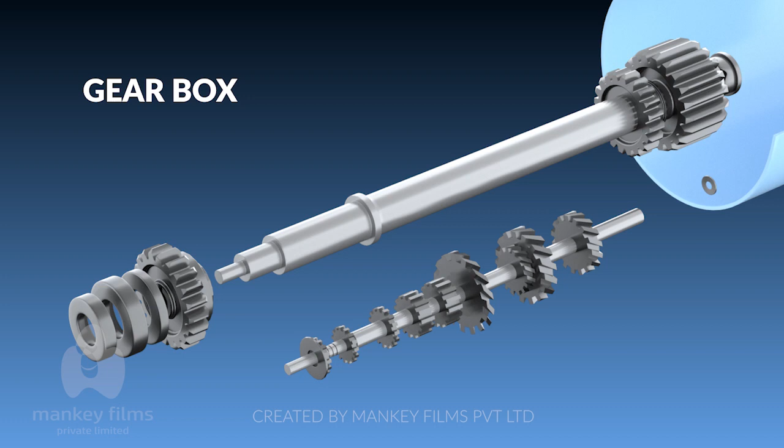In general, there will be a lot of resistance for a vehicle to move on the road. This resistance is because of the road, the air and load of the vehicle. A gearbox helps us to attain different torque and speed to overcome these resistances. When a set of gears is arranged in a shaft, it is called a gear train. There are three different types of gear trains: simple gear train, compound gear train, and power train.

Simple gear train. When there is only one gear on each shaft, then it is known as a simple gear train. A simple gear train is designed for one of the purposes: to increase torque, to increase speed, and to change direction. Like I said here, the small gear rotates and drives the bigger gear to rotate. For example, let's say gear 1 has 10 teeth and gear 2 has 20 teeth. Assume gear 1 rotates at 50 rpm.

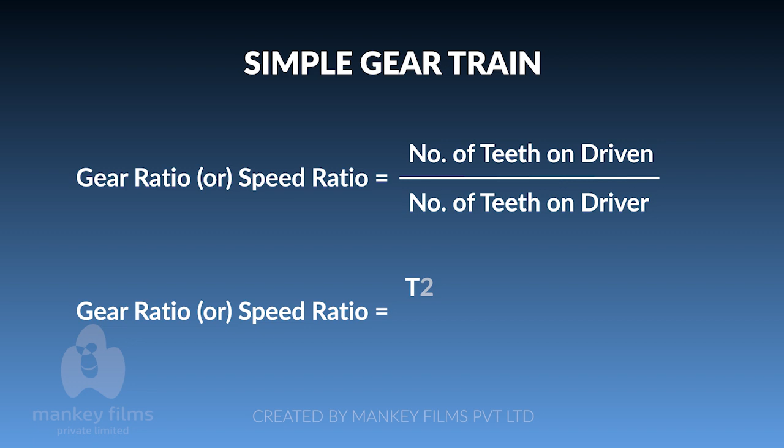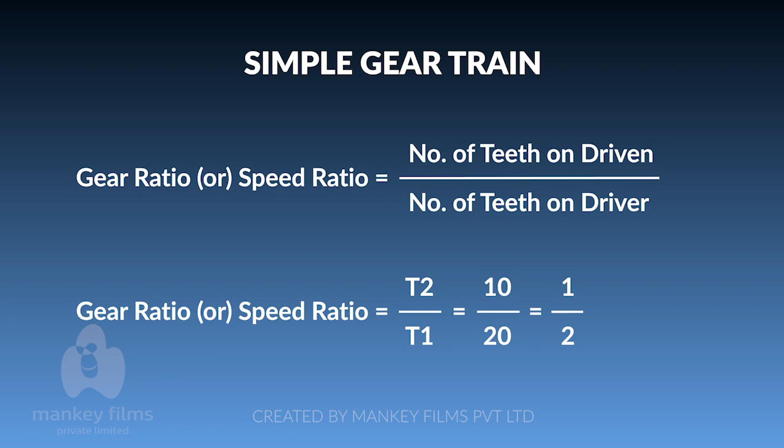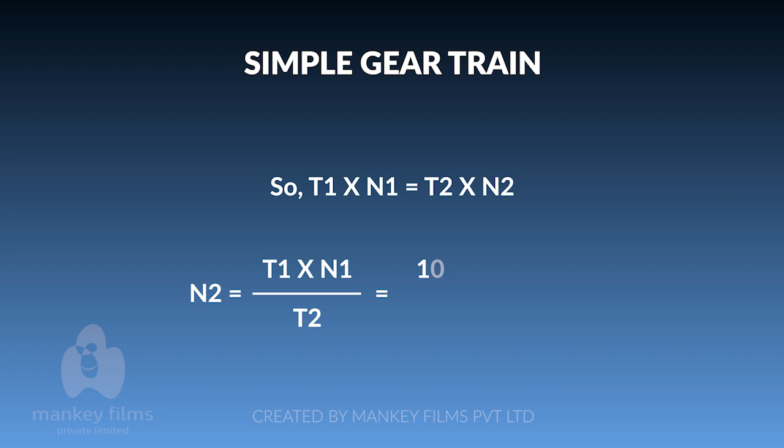So, to find the gear ratio or speed ratio is equal to number of teeth on the driven divided by number of teeth on the driver. Gear ratio is equal to T2 divided by T1. In this case, T2 is 10 and T1 is 20. So, 10 divided by 20, which is equal to 1 by 2 or 1:2. So, T1 into N1 is equal to T2 into N2. So effectively, N2 is equal to T1 into N1 divided by T2, which in this case is equal to 10 into 50 divided by 20, which is equal to 25. So N2 is equal to 25.

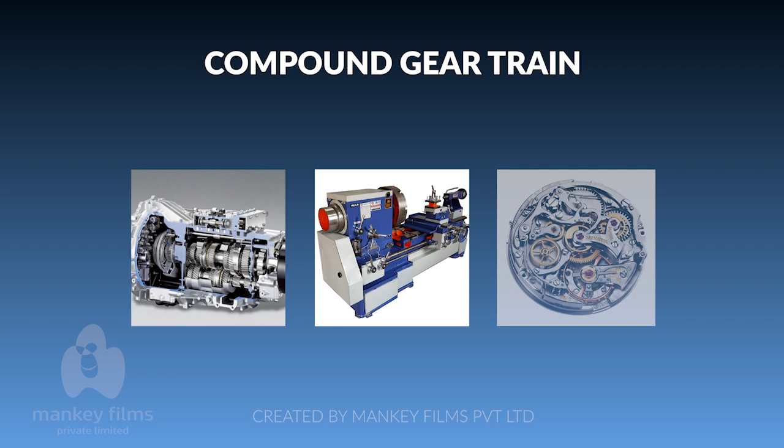The next one is compound gear train. When there are more than one gear on a shaft, it is called a compound gear train. In this type, there is an intermediate gear which helps the driver gear to rotate the driven gear. These types of gear trains are mostly used in automobile gear systems, lathe machines, clocks and watches. Generally, compound gear trains are used where the generated power must be regulated before the usage. The formula to find the gear ratio here is gear ratio is equal to product of the number of teeth on the driven divided by product of the number of teeth on the driver.

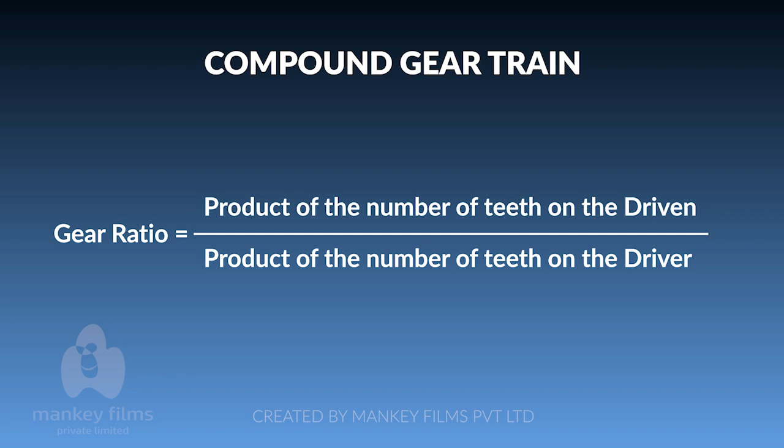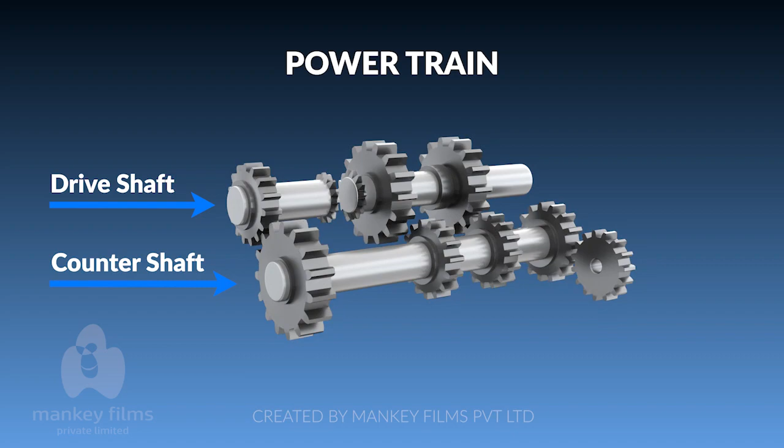Sliding mesh gearbox. Sliding mesh gearbox is nothing but a transmission system that consists of various sets of gears and shafts that are arranged together in an organized fashion. Here, the gear shifting is done by the sliding of gears towards the right and left over the shaft with the help of a gear lever operated by the driver. It has three shafts: clutch shaft, lay shaft, and main shaft. The clutch shaft transmits the power from engine. The lay shaft acts as an intermediate shaft which helps in rotating the gears of main shaft. The main shaft acts as an output shaft which transfers the power from engine.

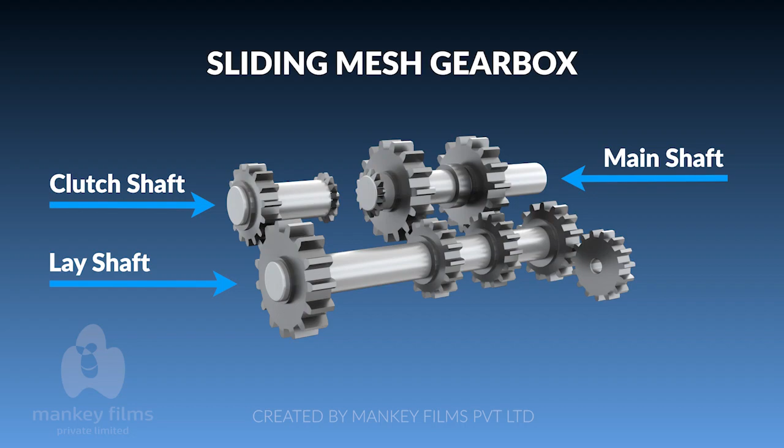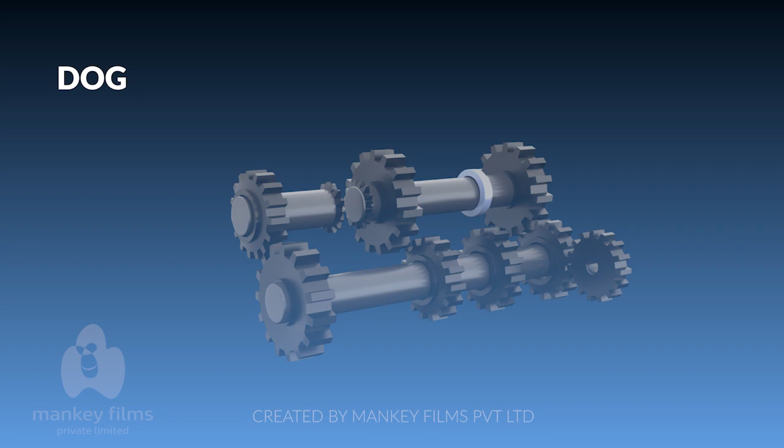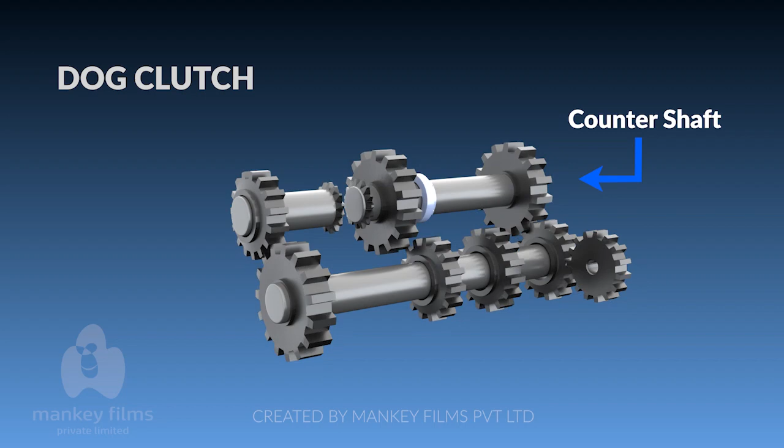The next one is constant mesh gearbox. As the name states, in this gearbox, all the gears in the main shaft are constantly meshed with the corresponding gears in the counter shaft. But there will be no power transmission. To transmit power here, we use the dog clutch. The dog clutch collides with the gears of main shaft and transmits the power received from the main shaft. In this type of gearbox, the helical gears are engaged, and since more than one tooth is in contact at a time, the gear shifting is so smooth. And also, since we use a sliding dog clutch, the wear of gear is less.

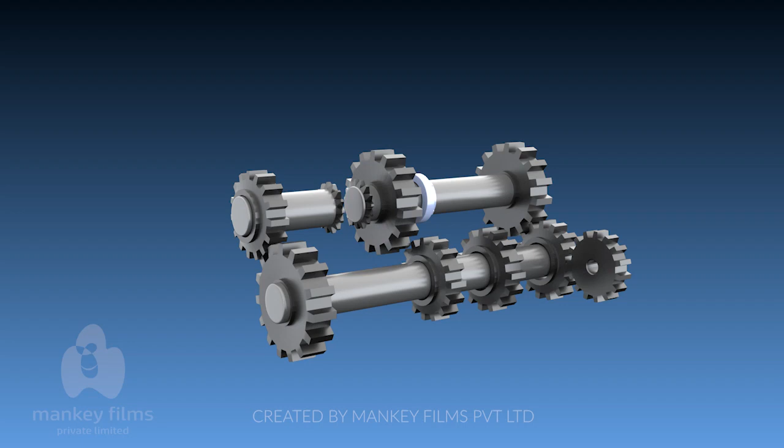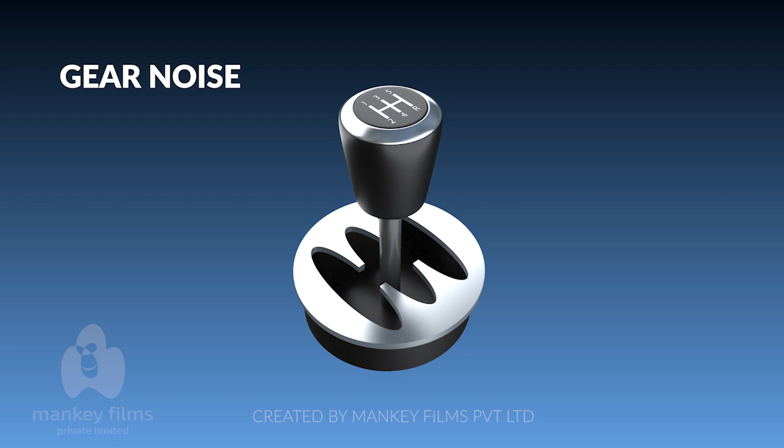Now let's look at troubles caused by these gearboxes. Gear noise. The gearbox causes noise when the gear shifting fork is arranged improperly. The misalignment between the gearbox and engine also causes the gear noise. The gearbox needs to be lubricated periodically. If not, it generates noise. Also, broken gear teeth cause these kinds of noises.

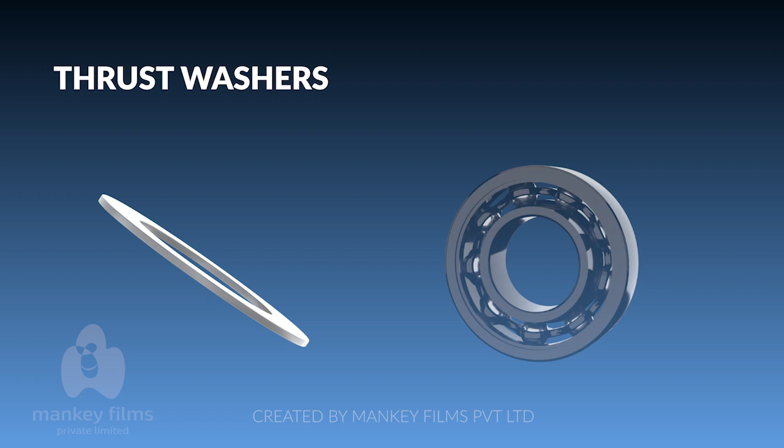Thrust washers. It's fitted with roller bearings. Thrust bearings or thrust washers are used to limit the end play and also reduce the friction between two rotating parts. Roller bearings are used in combination with flat thrust washers to control end play of a shaft or the gap between a gear and its drum.

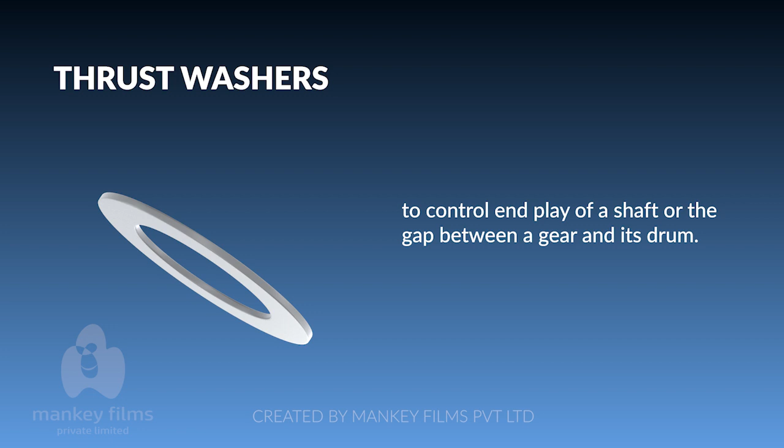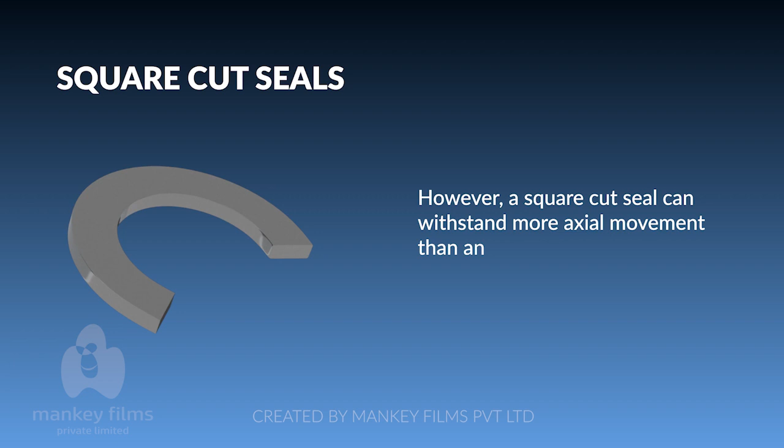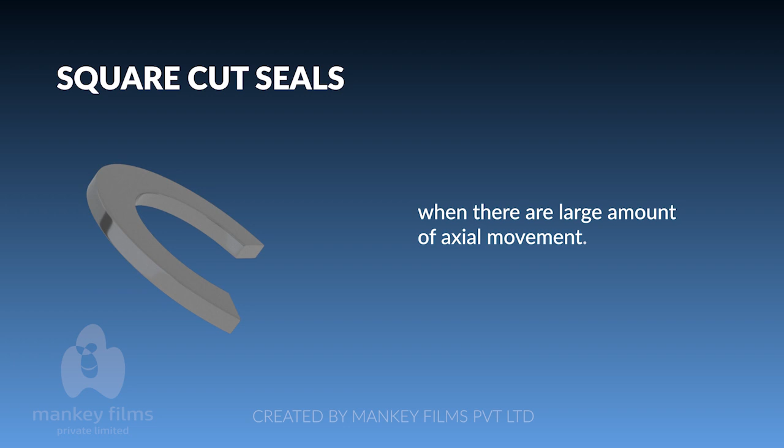Square cut seals. It is similar to an O-ring. However, a square cut seal can withstand more axial movement than an O-ring can. Square cut seals have a rectangular or square cross section. They are designed this way to prevent the seal from rolling in its groove when there are large amounts of axial movement.

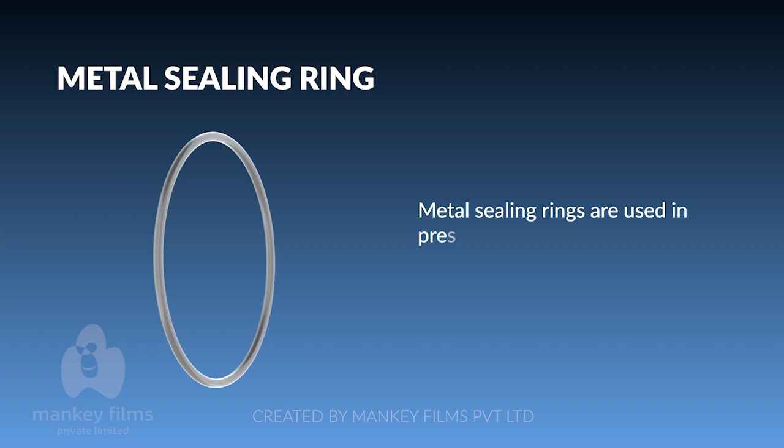Metal sealing rings. The metal sealing rings are used in places in which some leakage is acceptable. Metal sealing rings are used in pressurized transmissions. Ring seals are made of cast iron, nylon or Teflon.

Teflon seals. Some transmissions use Teflon seals instead of metal seals. Teflon provides a softer sealing surface, which results in less wear on the surface that it rides on and therefore a longer lasting seal. Teflon seals are similar in appearance to metal seals except for the hook end type. The ends of locking Teflon seals are cut at an angle.

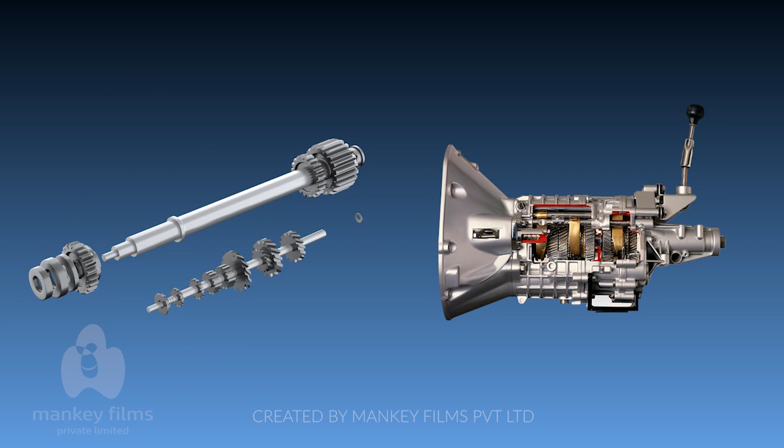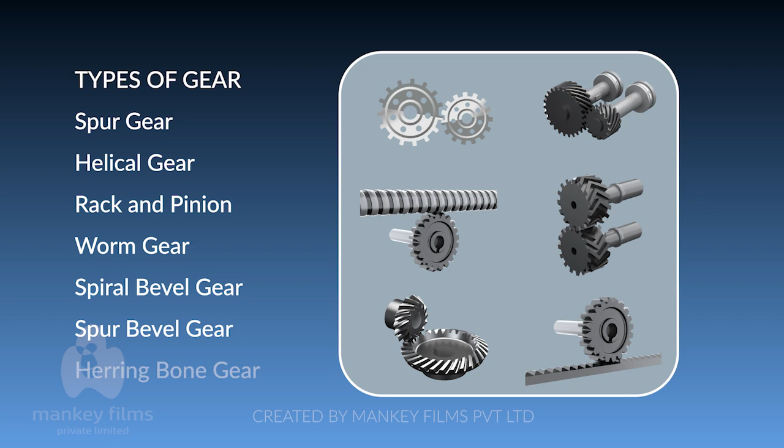Now that we have seen the gear train and gearbox, let's learn about gears. There are 7 different types of gears: spur gear, helical gear, rack and pinion, worm gear, spiral bevel gear, spur bevel gear, herringbone gear.

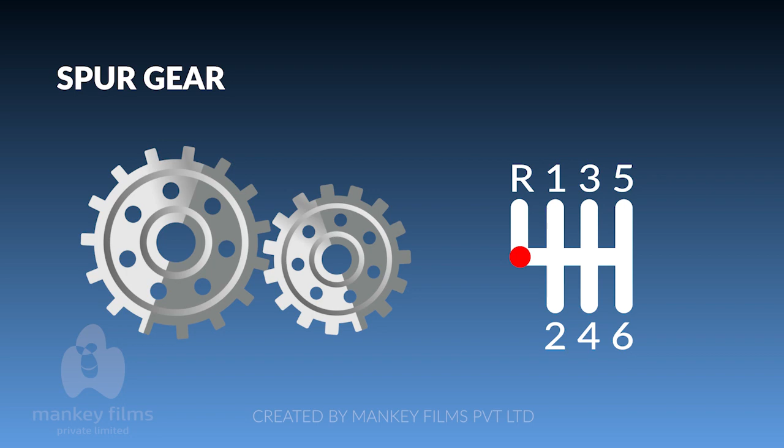First, let's see about spur gears. Teeth are straight and parallel to the gear axis. Only one tooth is in contact at a time. No axial thrust is produced while transmitting torque, hence it is often used for reverse gear. In transmission, it transmits torque for parallel and coplanar shafts. The major drawback of spur gear is clicking noise during teeth contact.

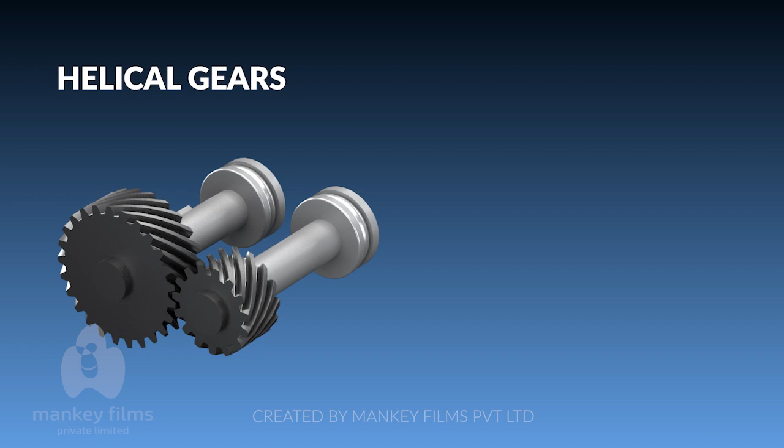Now let us see about helical gears. Teeth are at an angle to the gear axis. More than one tooth is in contact at the same time. Axial thrust is produced while transmitting torque. Gear will move front and back.

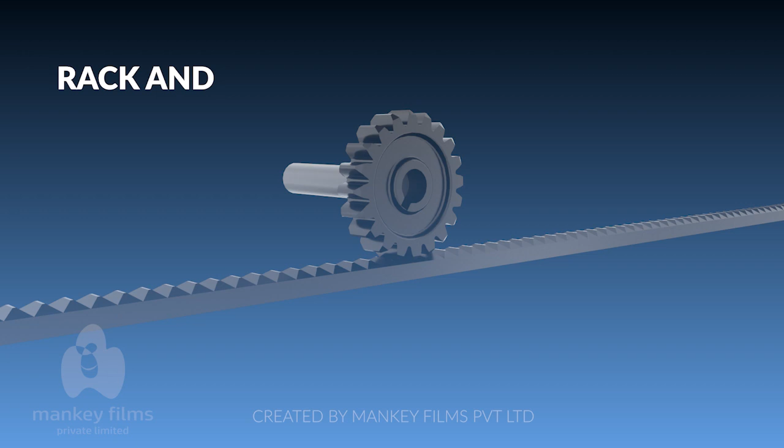Now let us learn about rack and pinion. Teeth are parallel to the axis of the gears. One tooth is in contact. No axial thrust is produced while transmitting torque. It converts rotary motion into linear motion and vice versa.

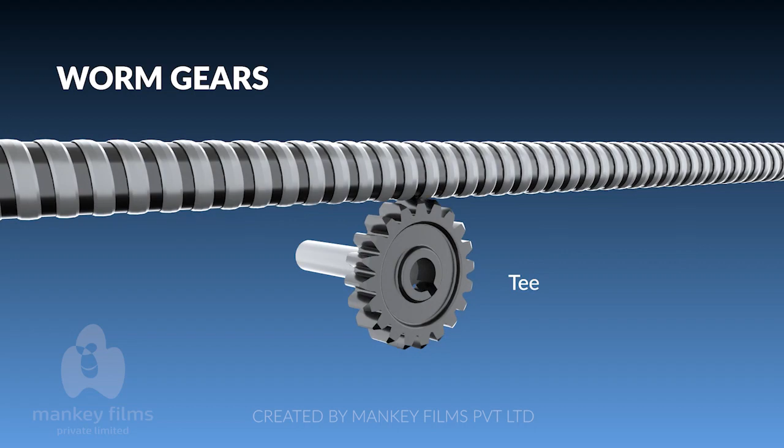Now let us learn about worm gears. Teeth are at an angle with the axis and are curved, more than one tooth in contact. Axial thrust is produced while transmitting torque. It transmits torque at right angle for non-parallel and non-coplanar shafts.

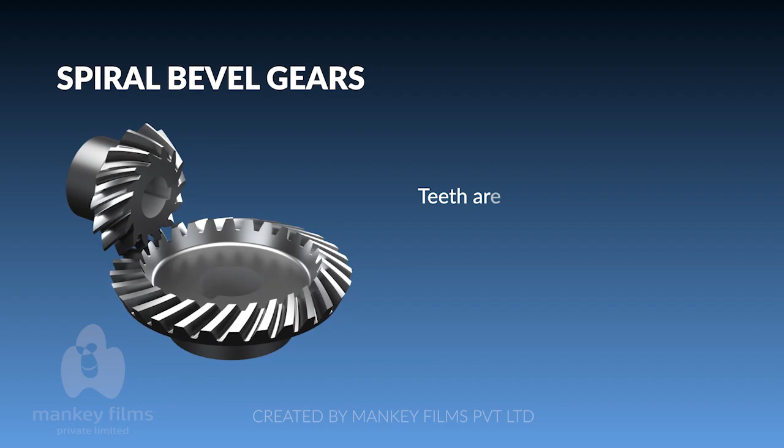Now let us learn about spiral bevel gears. Teeth are curved, more than one tooth in contact, produces axial thrust, used to transmit torque at 90-degree axis.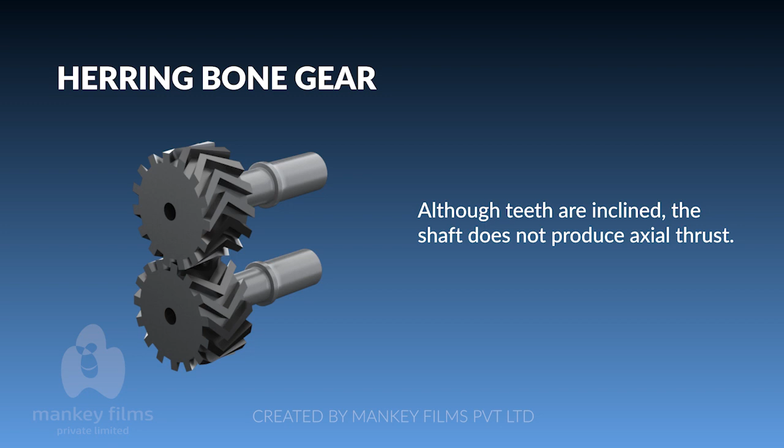Now let us learn about herringbone gear. Teeth are straight at an angle and opposite, more than one tooth in contact. Although teeth are inclined, the shaft does not produce axial thrust. It neutralizes the axial thrust. Used to transmit torque from parallel and coplanar axes. I hope you have a clear understanding about this topic.